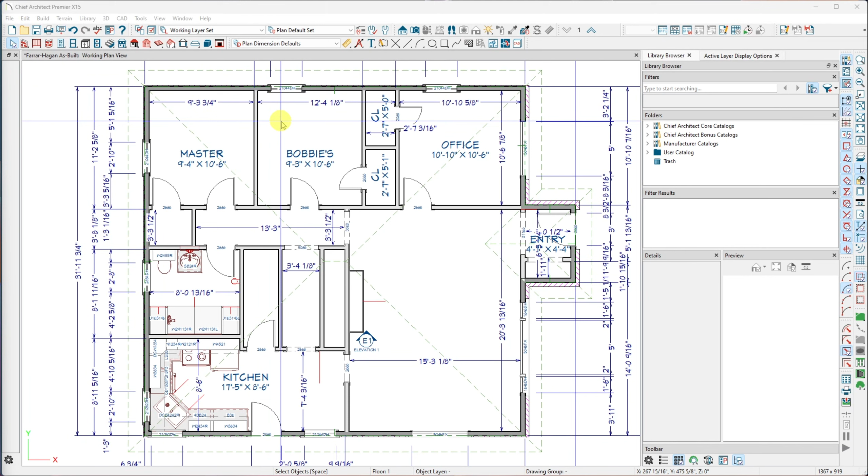I have a very large monitor, you're looking at half of it. So when I expand this out to full screen, you can only see half. What I like to do is come over here and use my space mouse, click on it. I did a lesson on this if you guys need to know how, a lesson on how to create these icons in your space mouse, and so they match the icons for your program.

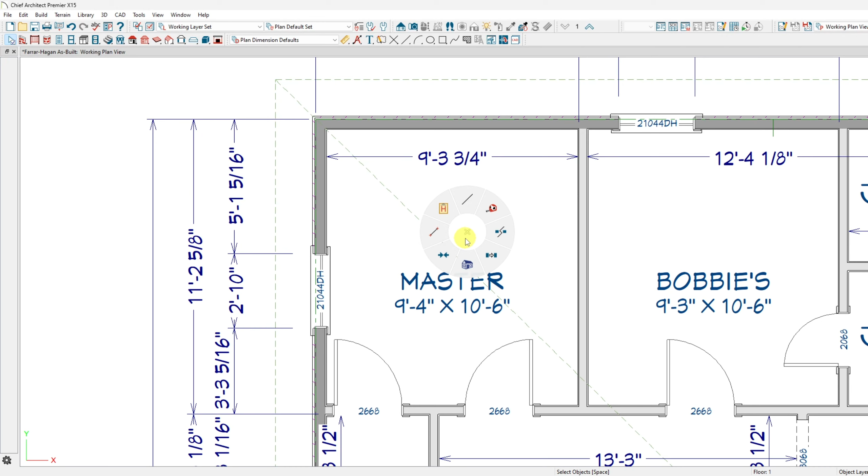So I want to create a 3D rendering. You just swipe through it and boom, I have a 3D rendering.

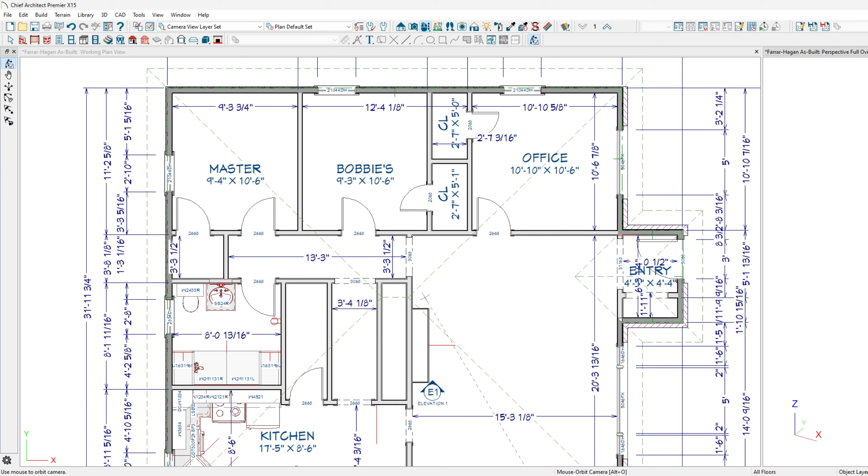Now what I like to do is split my screen in half. So I'm going to take it over here, put it on this side. Because of this big monitor, we can only see half at a time, so I'm going to switch over to that half. Let's take a look, and here we are. Now I want to get my dividing line in a good position there so that when I'm looking at this, I'm recording this side and hopefully I always remember to flip to the other side.

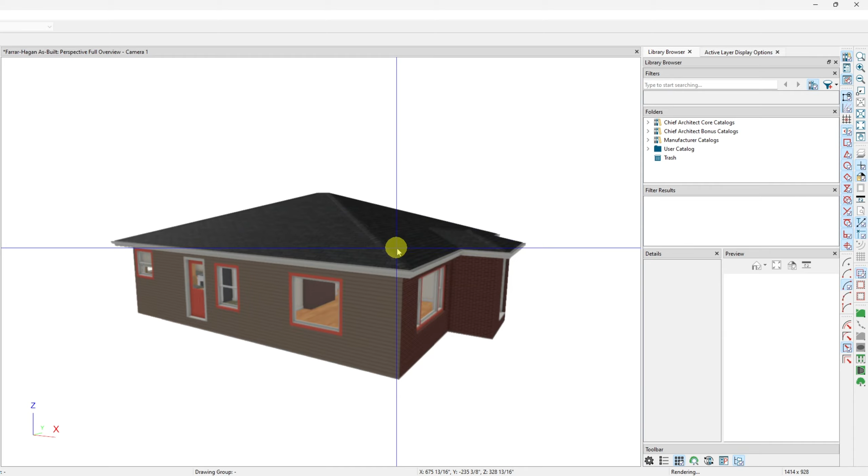So I have some awful colored trim and I think we're going to try and tackle that this summer. It needs to be repainted anyway, so we'll strip it and see if we can find a better color. We'll get some good pictures and stuff to go along with this video at some point.

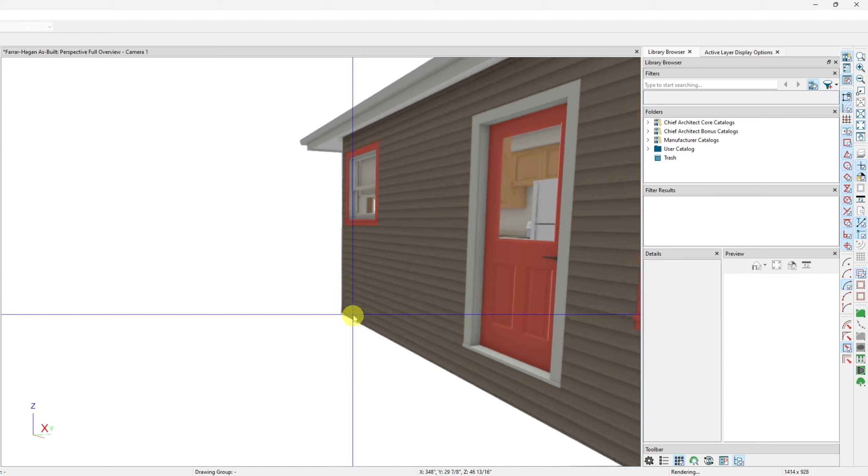So this is the door that we almost always enter. On my lot, this is a big, long access way. In fact, because it's my own project, I can do things like show you where I'm at. So here is the vicinity map, and that's the long driveway back to a really cool garage, and that's my wee house.

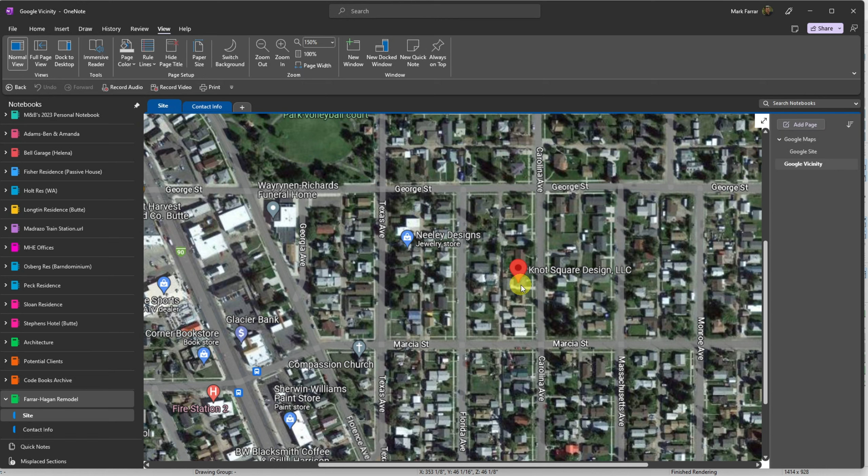And so if we zoom into the site, that's probably too close. How can I fix that real fast? Oh, I'm at 150%, let's go down to 125. No, let's try 100. All right.

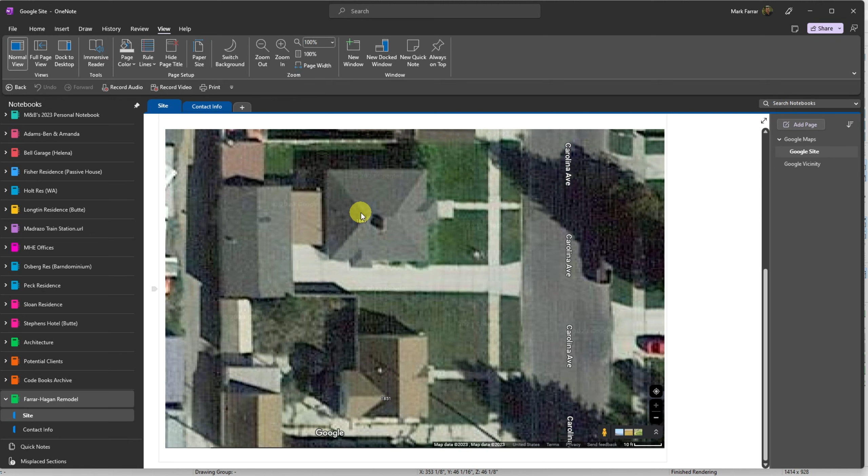So that's basically my lot right there. There it is, there's a good shot. So the dividing line, there's a fence, and there's my other neighbor's fence.

So this is a garage, this is a shed, this is a covered area that you can walk through. You can also walk through here to the alley where my garbage and stuff gets put. Walkway up to the house. Got a porch here, I got to put a little porch here, a little covered roof for each of these I haven't added yet, and haven't put in the chimney coming out of the roof. But hopefully that's going to go away.

This is fun, to get the snow all the way out without piling it onto your neighbor. I can't pile it against my house either. And this is a cool gear from the mines that's planted in my yard, just for architectural reasons.

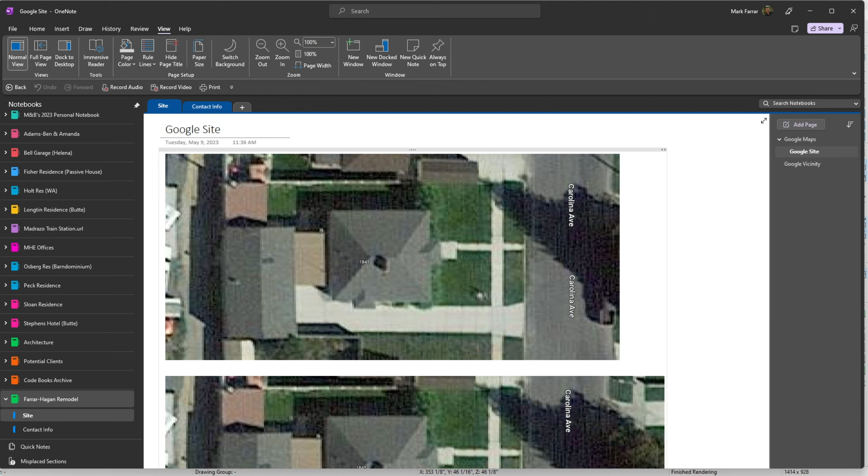But at any rate, let's go back to here and let's go in. So this is the door we usually use because this is where the driveway is. Come in here and now we're in the kitchen. And as you can see, there's not a lot of room to do stuff.

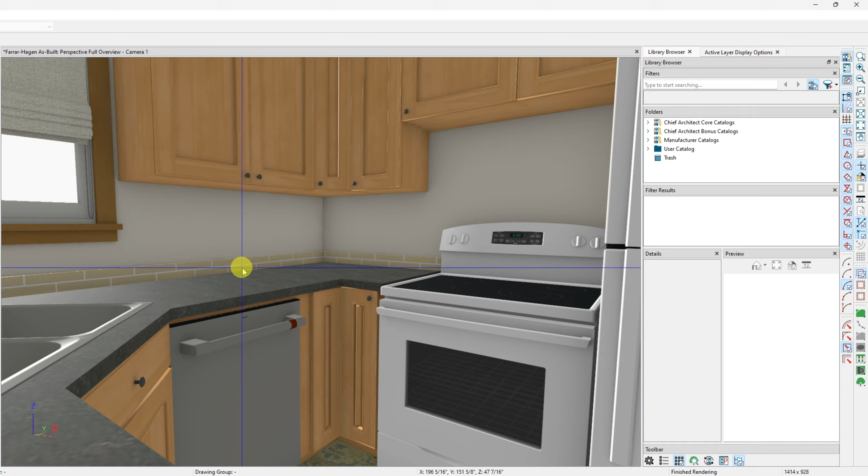And I need to hang our microwave because right now it's sitting here. No, sorry, we did put it on a cart down here now in front of the window. And we want a big piece to go here to help out with space temporarily until we do the full remodel. Door's lovely, always hits this counter.

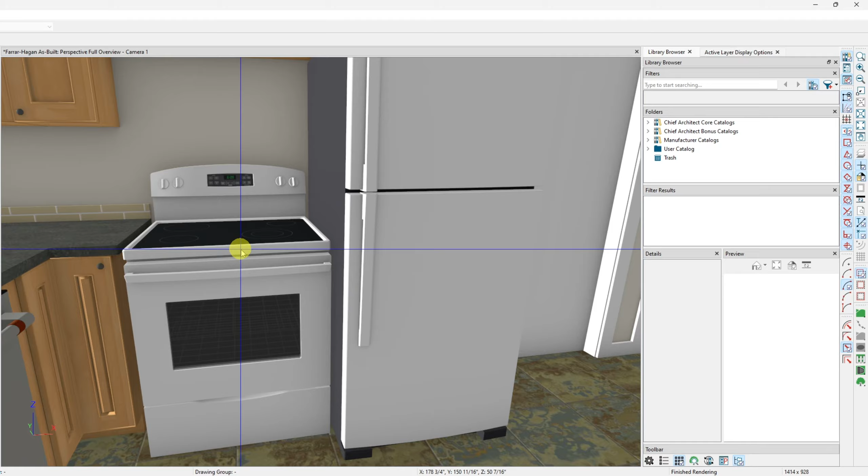And dishwasher needs to be replaced. I'm not showing a correct stove because we have one of those old heat element stoves, but we're looking at induction. If I do get induction, my understanding is that the only inductions I have seen so far are 220, so I will have to have my little tiny panel with 4 breakers in it replaced. 220 exists in the detached garage. We'll get all the site and stuff, maybe we'll do that together.

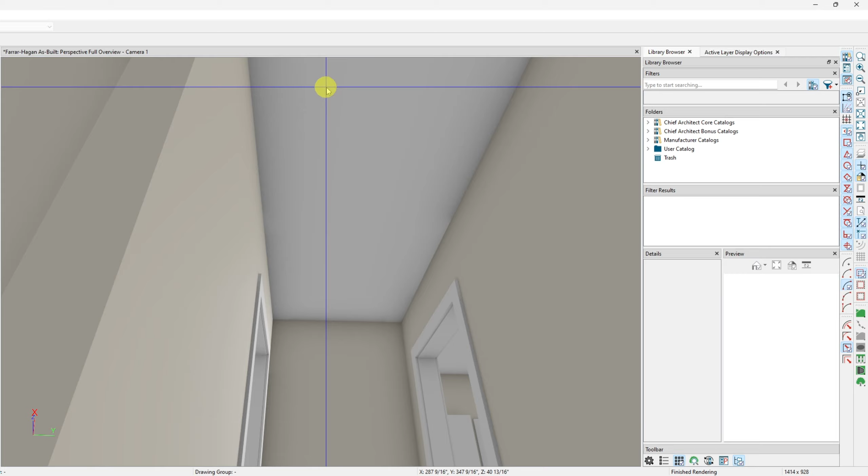So today's project is to get up, show the attic access, and put in the framing around it and get the general layout of my boards. I'm not worried about getting them exact because I'd have to measure each one. On houses of this age, they are approximately 24 inches on center, but they don't tend to be exact.

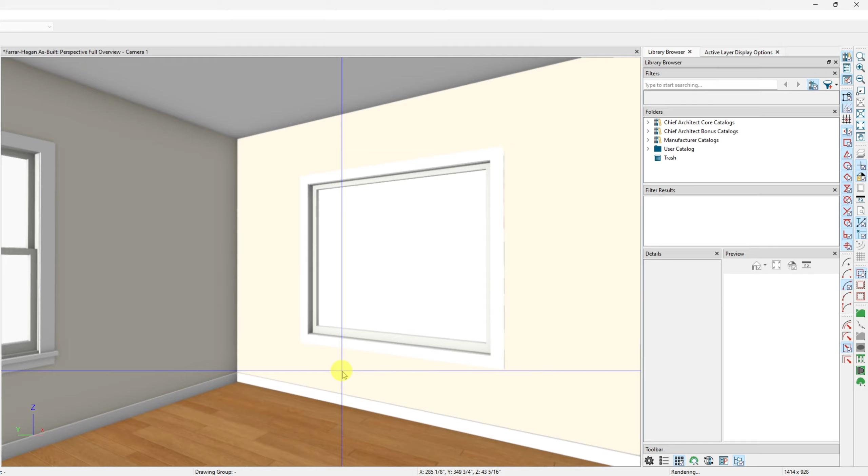So this is my office, and that is where the sun's coming in right now, and it's gorgeous. In fact, if I do a render, I can actually show you.

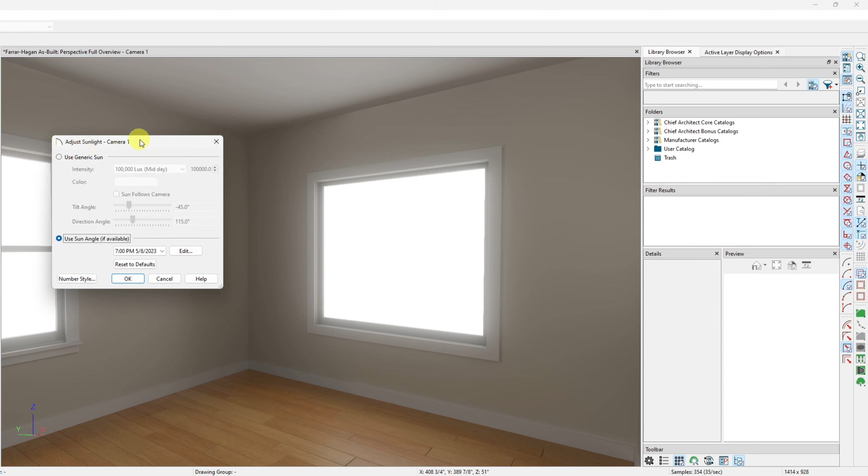So if we do this and then I go up and I change my settings, right now it is 5/11 - May 11th, at 7 o'clock straight up. That's an easy one.

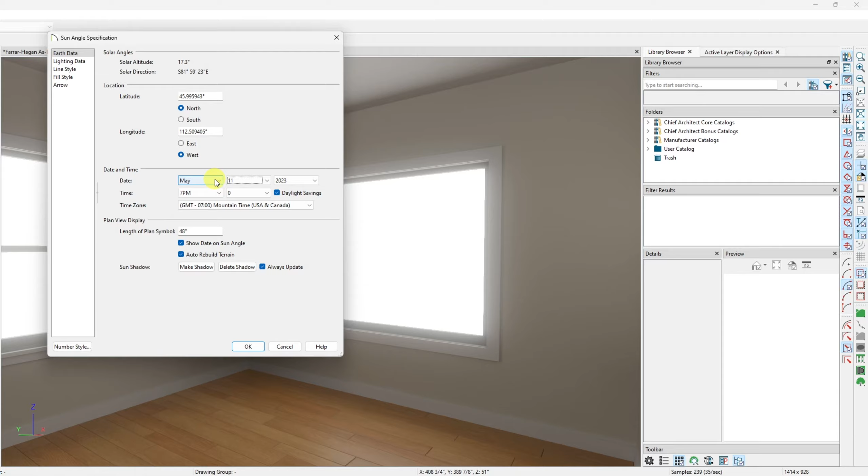So this is what it actually is doing. Oh, why didn't it show my shadows? I can't tell you why it's not adjusting for shadows. I don't have any lights in here yet.

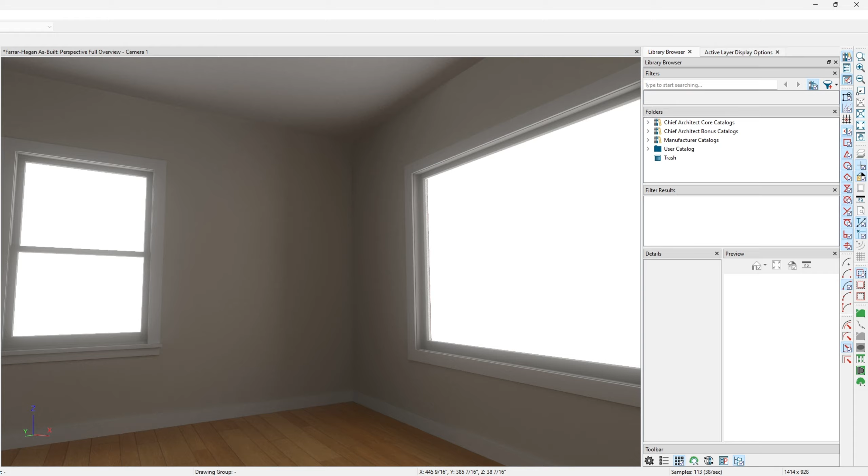Let's check. This is the move the sun tool. Some of this stuff is new to 15, so I'm not sure. Use sun angle if available. Well, that still didn't turn it on. Sometimes it can be a little fussy and you have to actually close it.

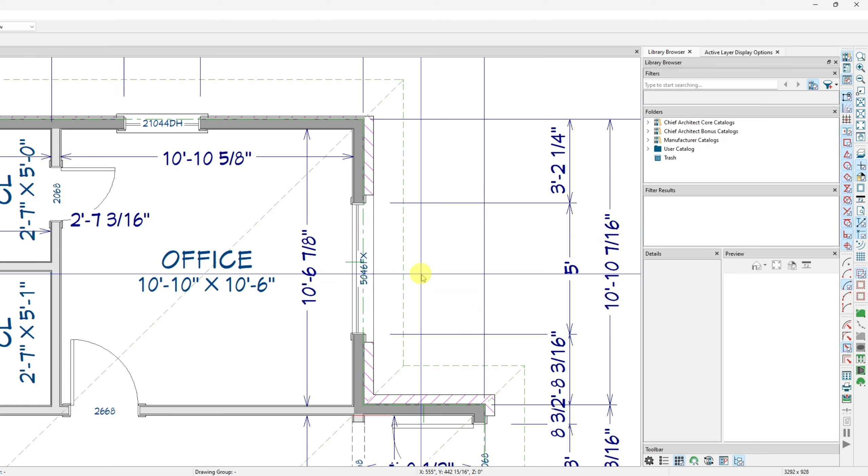Then I'll do it over here on this side. Recreate it. And split it. And then let's go back to our rendering technique and see if we got it, it's still not shining.

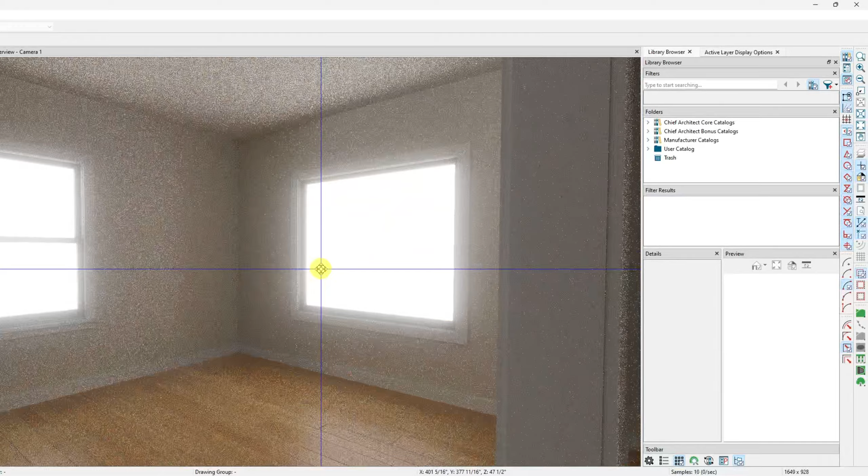We had it shining across the floor and showing everything, and I haven't changed any settings, so I can't explain why that is. It should be casting stuff across my floor right now, and the fact that it's not is one of those things that I just sometimes don't quite get.

Let's see. So all that is correct. This we just set. We do have daylight savings time, but it's not current right now. So I don't know what that means exactly - is it supposed to be on because you're in a zone that uses it, or is it on only when you're in daylight savings?

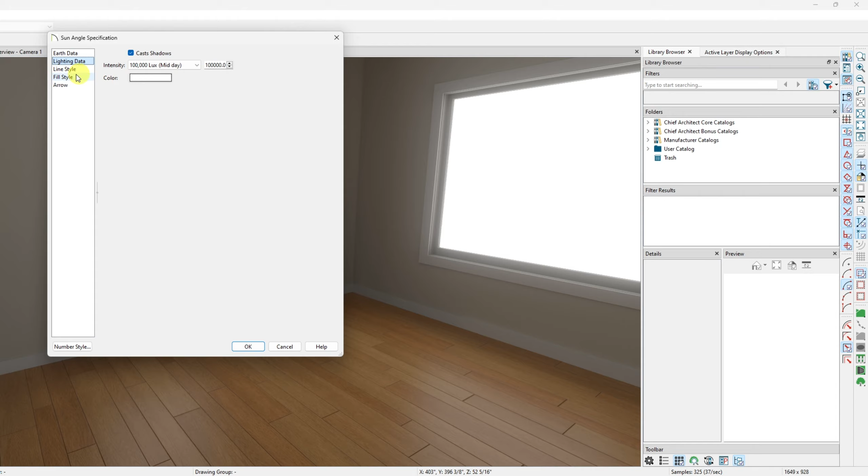Make shadow. Always update. Cast shadows - I can't tell you why I do not have that. Looks like I might be sending some of this video off.

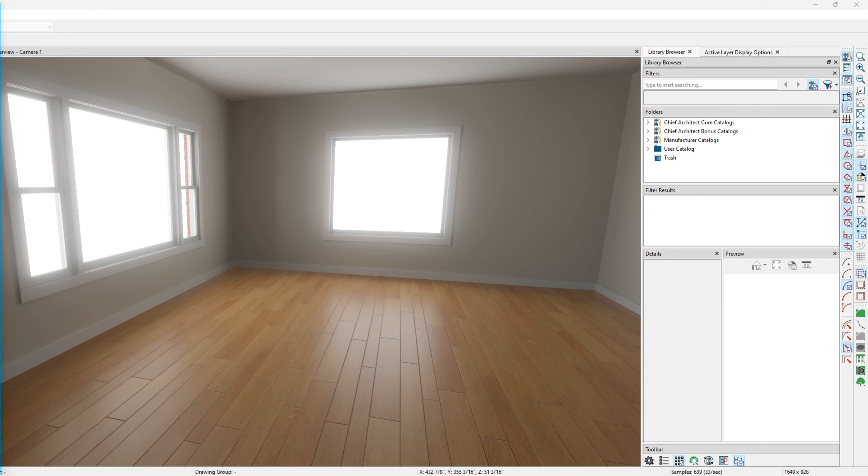So, at any rate, I'm going to skip that for now because what I really want to do today is take this and put it into AutoCAD. I haven't programmed my 3D mouse for AutoCAD yet, but I don't use it much for AutoCAD - in fact, I really don't use it at all. I do everything in AutoCAD in 2 dimensions except when I am pulling in stuff from the point cloud.

So I'm going to do a new drawing because I haven't created anything yet for this project. We're going to open it from my standard template. And so first thing I'm going to do is just save as, and I think I already created a folder for it.

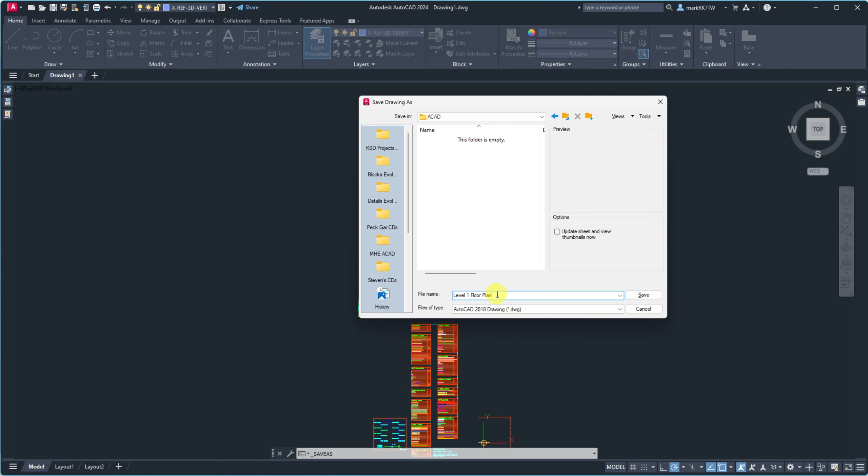So let's go to my network and let's see. I think we've got down at the bottom the Farrar-Hagan remodel AutoCAD, and we are going to put - well, I don't even need to do that - let's just put level 1 floor plan. And then once I've saved that, then I'm going to go back to Chief.

I'm going to do File, Export, DWG. And I'll probably have to do a new introduction just to say what I'm doing in this video. Wasn't very good of me there.

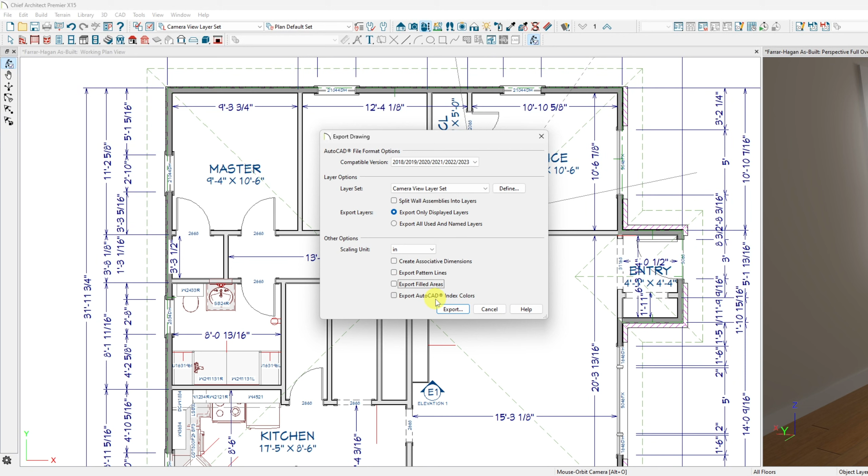So I don't care about the patterns or the fill areas, so I'm going to export that. Let's go to my file, and in here we're going to need a new folder. So new folder, and what I call this is export from Chief. And then we'll pop into there and we'll give it a name, and this will be the level 1 floor plan.

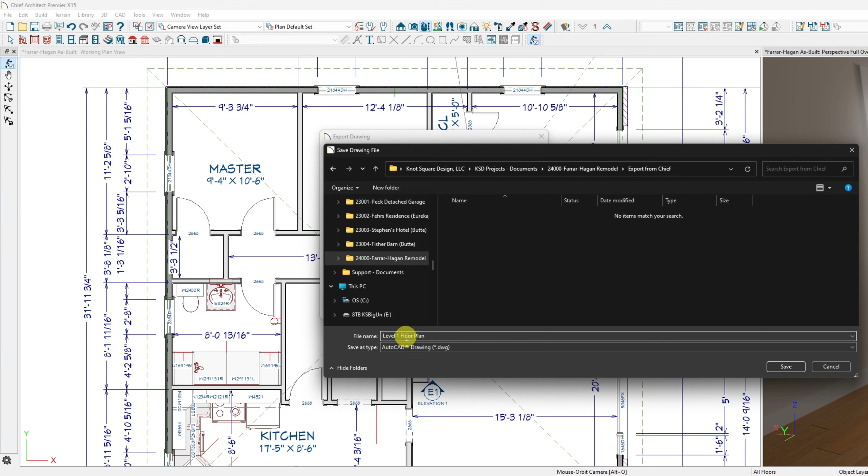So now that that's done, I should be able to go into AutoCAD and import. So under here, File, Import... oh no, I don't want to import that. I want to Xref it.

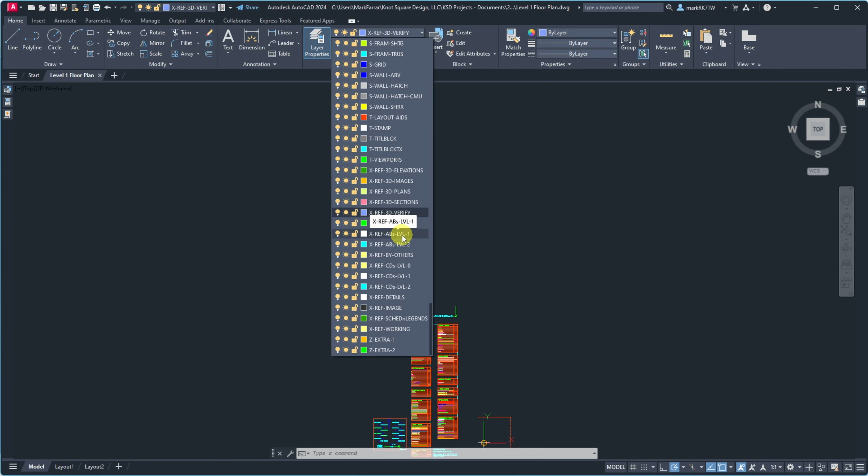So let's get onto a layer. Here's a 3D Verify layer, which is a great one to start with. Or I can use my as-built level 1. Let's go with that, our as-built level 1. So I'm going to Xref and bring in that piece that I just created.

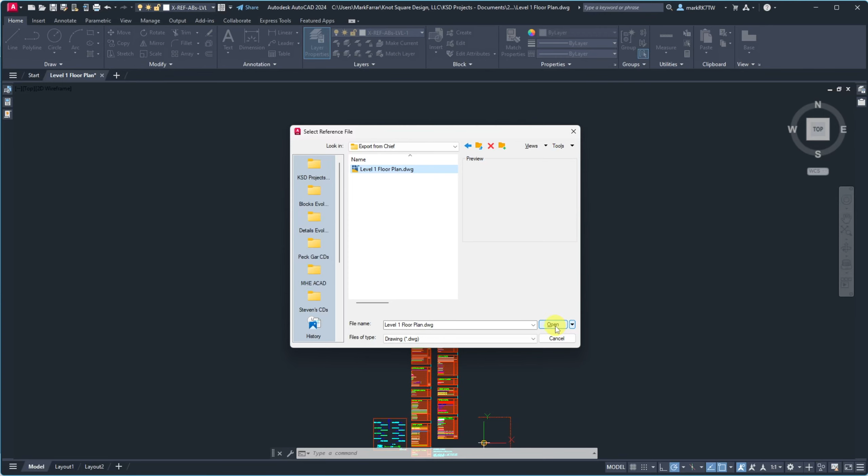Let's go to projects, down to here, Export from Chief, and that's the one we want. I want it to be an overlay, relative path, insertion point 0,0,0, and the scale should be 1,1,1. Okay, and it should be there.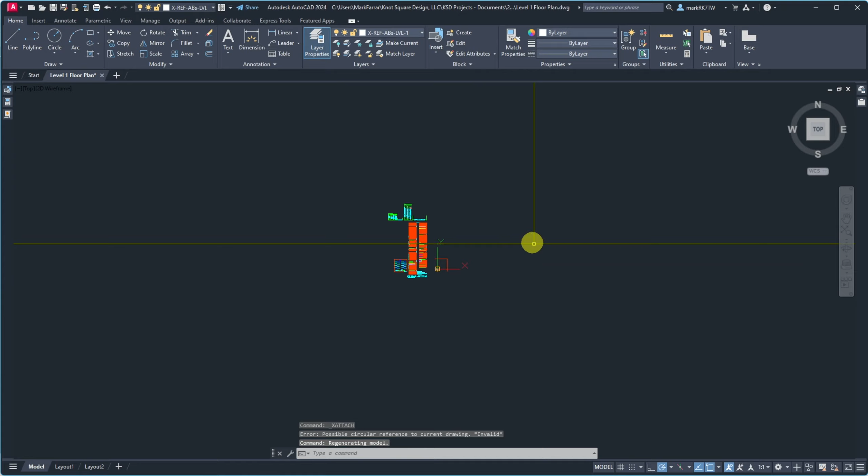Do I see it? No, no, I don't see it. Why didn't it come in? Let's zoom extent, make sure it didn't disappear into space. So I don't think it imported it.

Let's see what we have in our Xref menu. It's not here. Attach. That. Open. Okay, it's not attaching it.

What I'm thinking is whatever's coming on the chief—let me investigate it and I'll be back with a solution.

Okay, so what I've done so far is I came in and I opened this drawing. It did give me a warning that this was not created by AutoCAD. So what I'm going to do is save it, and that may have been the whole issue. So I have two that are called the same thing, but I don't think it's going to be an issue.

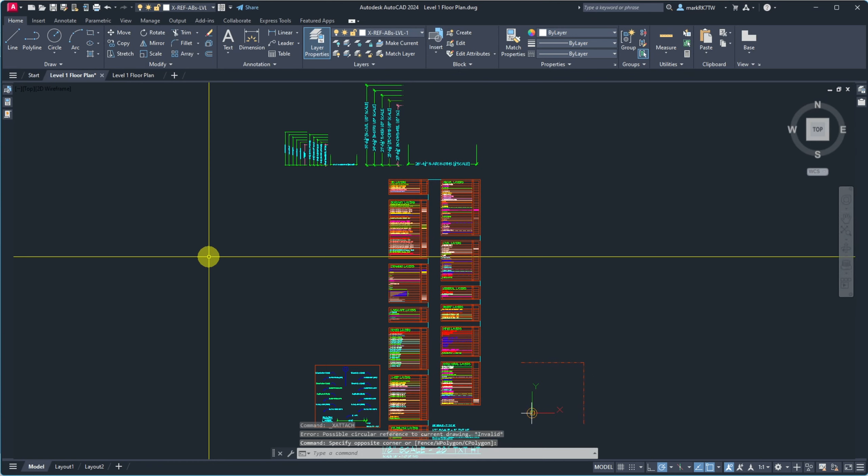So now let's try and bring that same drawing in, open, say OK. Boom. And I didn't see it attach. I have a clue because I saved it—I can see it.

And it's going on to this layer that's turned on. Overlay. Okay, you know what might be it? Let's check our layers. Oh, but it's not even showing up in the Xref. See, so here I'm not getting an extra filter for the Xref layers, which means an Xref was not attached.

And you can see, this is the drawing. So no Xref is actually being attached. And so when I save this, QSave is there. So I'm going to close it.

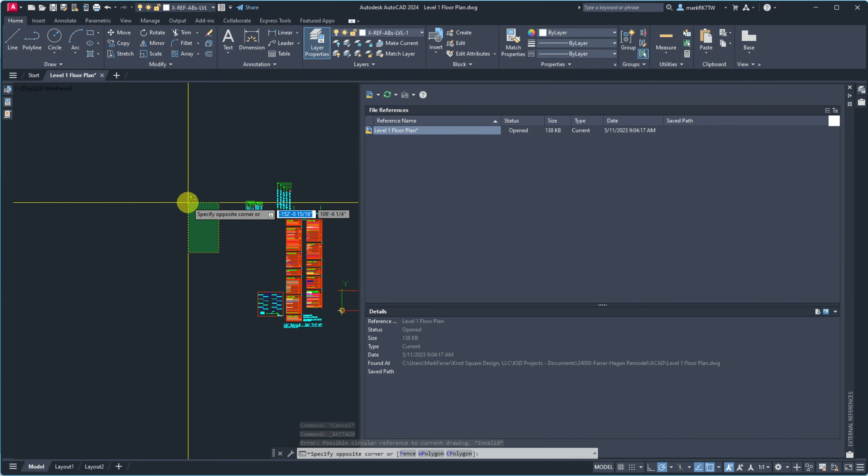I don't know what the deal is and why it's not bringing that in as an Xref, or why I can't even just do it or write over it. I mean, I guess I could—I could just use that as my level. But I just don't even understand why this is not working.

Because this is very curious—you come in, tell it that you want to attach this file, a valid DWG file. You say open, you check your settings, relative, that's fine. The scale factor, I guess let's try this.

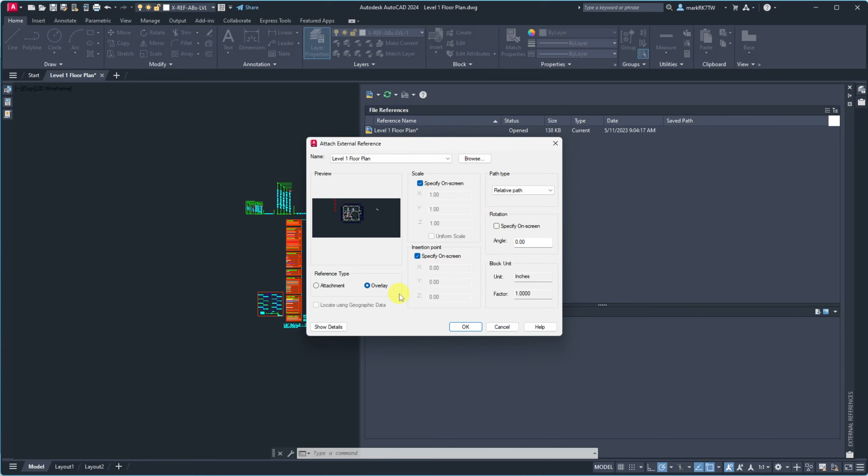And let's try and let it—see, it didn't even ask me anything. So something is wrong with the file.

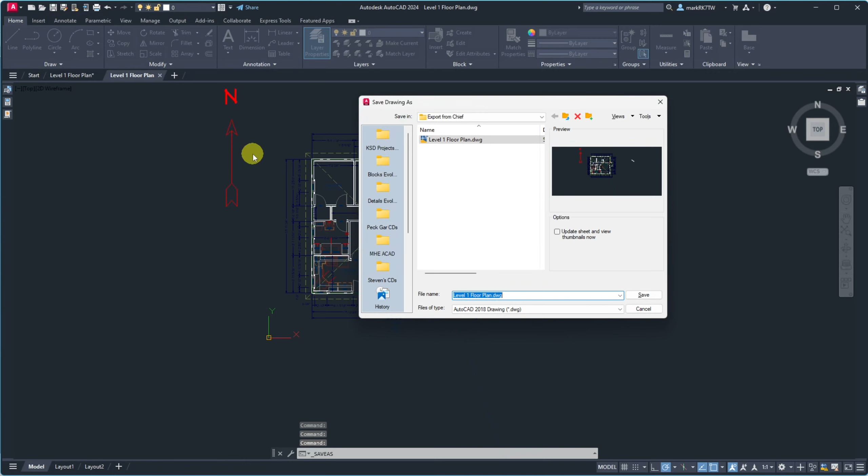So let's reopen that file and see what we have in it. See, continue opening DWG, even though saved by an application not developed by Autodesk. So now if I go save as, let's say basic.

Now, these are elements, right? They are, and it's on Chief Architect layers. See the small letters—all my layers will be in caps. So these are all Chief Architect layers.

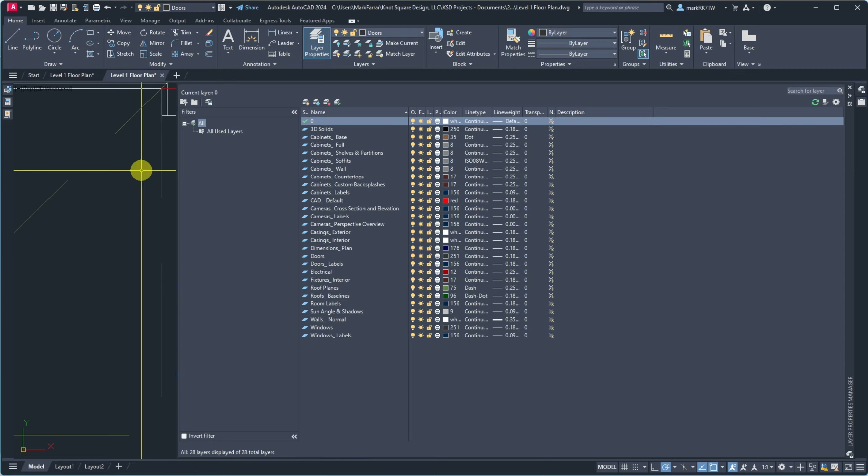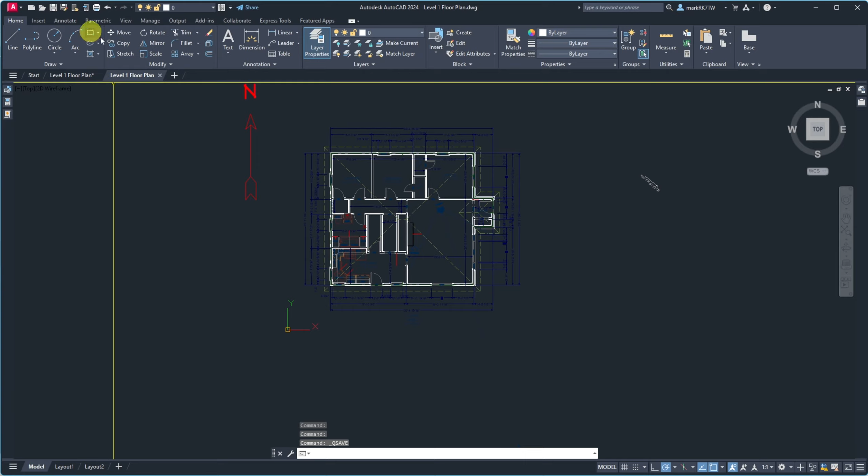So I could go through, and once I bring it into this file, where this is my layer set, I could go into Chief Architect layers and change the doors to be on this layer, and then that's just done—just a layer conversion. Or I can do what's called a layer merge, and that's what I'd like to try. So now that I have this saved again as a save as, let's try it again.

So now I'm going to do my Xref, and that could be the whole deal, that it just was not seeing it. So I don't want to specify that stuff—I want it to just come in. And it's sure as heck not. It is not coming in, even though I have...

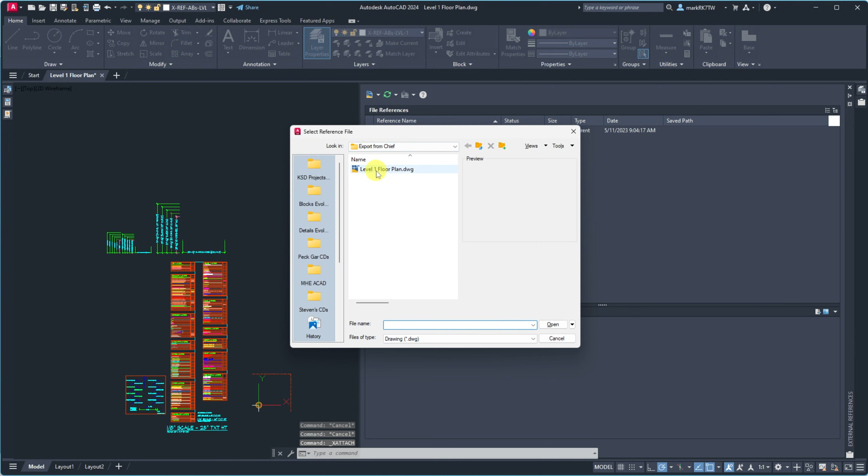No, it's not open. I don't know if that's causing a problem. No, it's just not coming in.